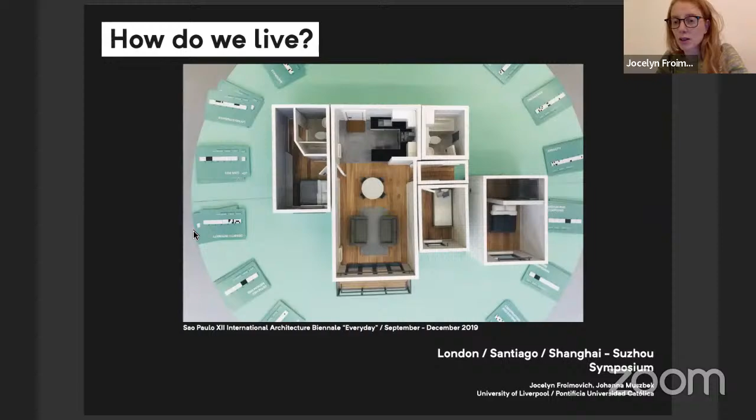The conclusion of this model is to critique the current housing offer as basically similar in all 3 cities.

It's important to mention that the exhibition that is going to travel to you is our latest iteration of the exhibit, which includes both the analytical part of the research and the manipulation of the typological repertoire that we presented.

We also launched quite recently, in November, our website, howdowelive.com. It's still in development because we view it as a dynamic index, a platform for us to invite a wider audience to partake in this discussion about current housing production. This shows the case studies currently classified both as design operations and the case studies representing the last 10 years of production in these 3 cities. This website is quite important for us.

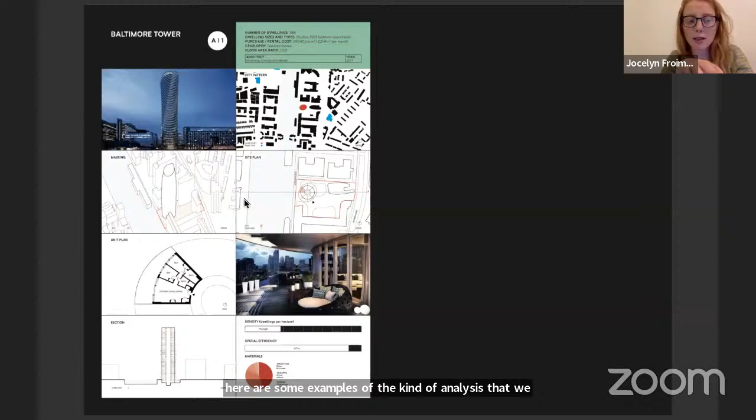Here are some examples of the analysis we did for each case study. The Baltimore Tower was one of our case studies, along with Douglas Tower and One Park Drive. This format allowed us to compare all the case studies one-to-one, analyzing the urban setting, its imagery, the kind of buildings, building systems, materials, and the layout of the individual units. This template was used to analyze every case study in each city.

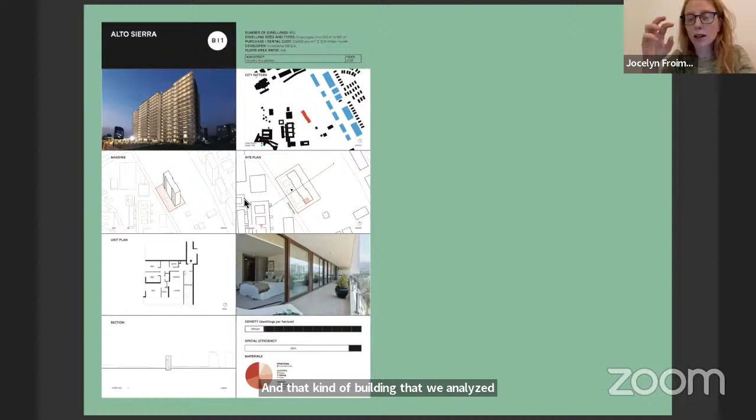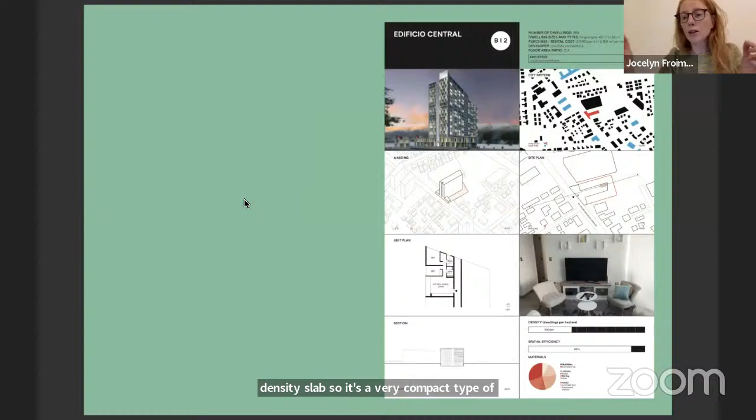Here we're looking at Santiago. The kind of building we analyzed within the high-rise, isolated high-rise category, is very different from the one in London. This is the high-density slab, a very compact type of building with a single corridor, different cores, and single units along the corridor. You can see all these types analyzed here - it's a very particular kind of compressed, hyperdense type.

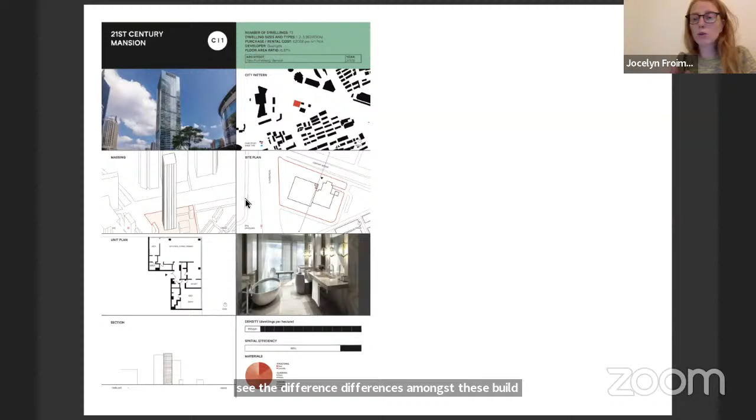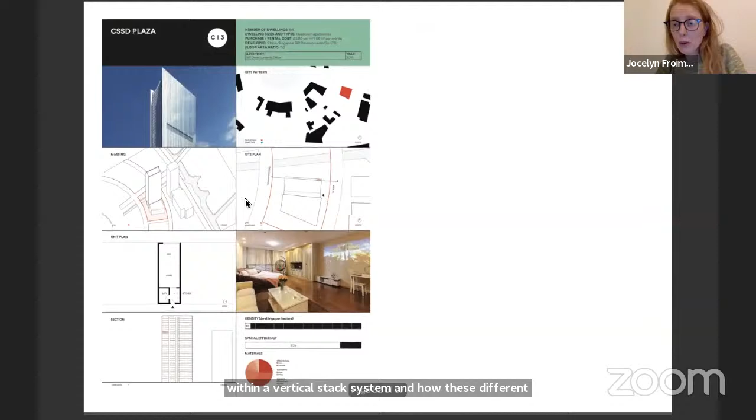Now looking at Shanghai-Suzhou, we looked at the mixed-use tower as a very extreme example of mixed use within a high-rise system. It was super interesting to see the differences among these buildings, how mixed use could develop within a vertical stacked system, and how these different programs reached the ground level and underground level.

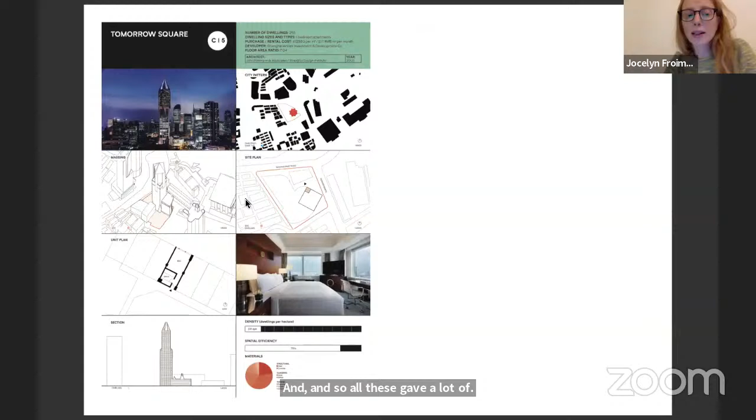All this gave a lot of material to analyze and then understand, so that we could fast forward into design categories, let's call them.

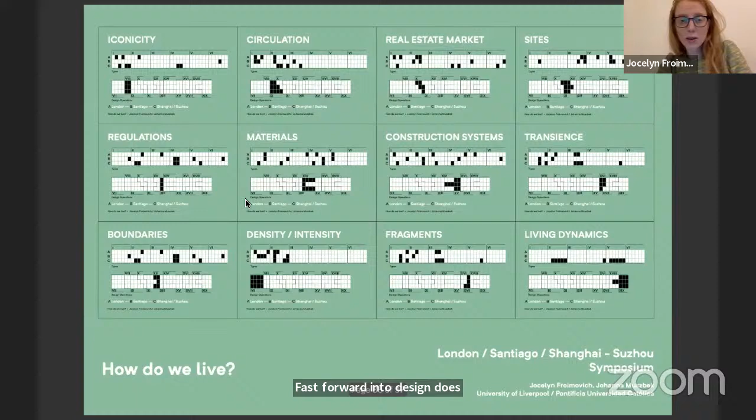As Jocelyn explained, our presentation - and you will see that in the exhibition - followed rows representing cities and columns representing types, and certain itineraries, as we call them, themes through which we started to compare and further interrogate our case studies, which allowed us to establish consistencies and particularities. These issues, problems and themes included sites, boundaries, density, intensity, iconicity, circulation, real estate market, materials, construction systems, layouts, just to name a couple.

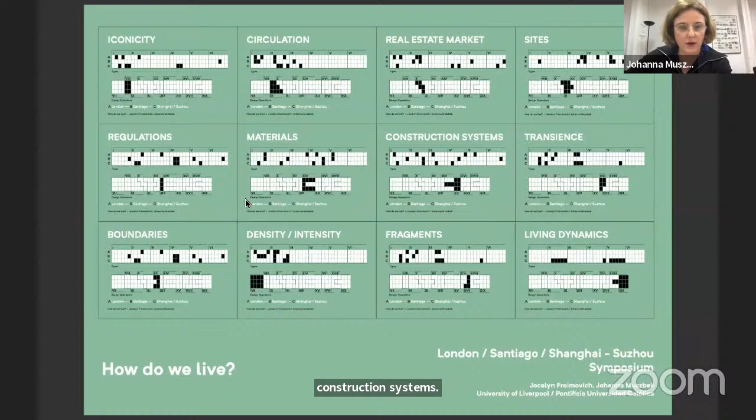Jos, you're up. Yeah, there's a little bit of delay, but now it's good.

So, basically, we would like to expand on this theme with you, just to give an example of how the system of the exhibition works. We left cards in the middle of the space for you to take, as if it were your guide through the exhibition. In this theme, you can look at the examples that have been selected and discuss this particular issue through reading them.

We thought that sites could be an operative term for us to think of design proposals, to fast forward ideas on how to participate in the question of the site. We've selected some of the students' work and proposals to discuss the idea of infill.

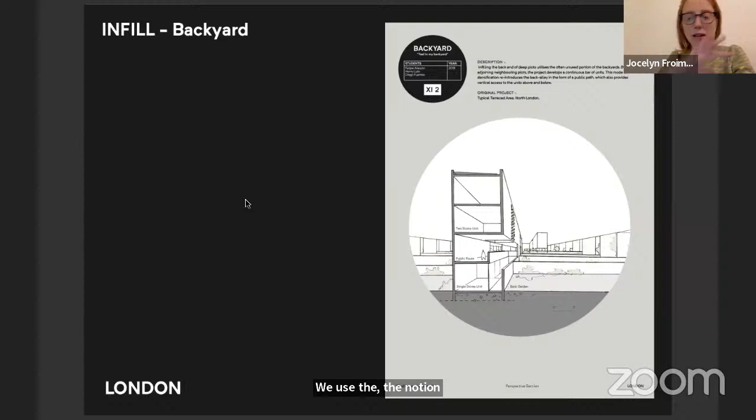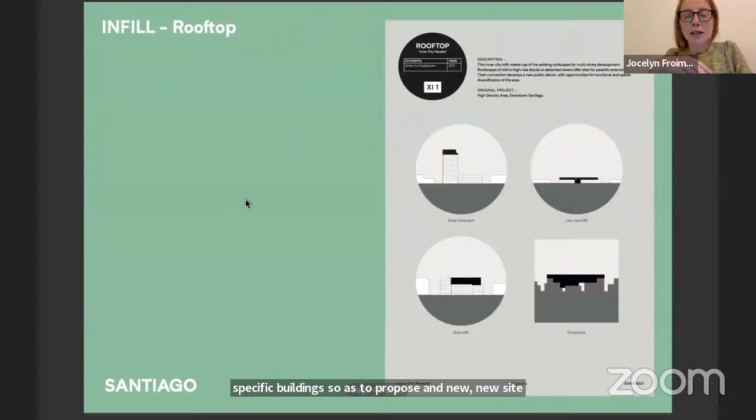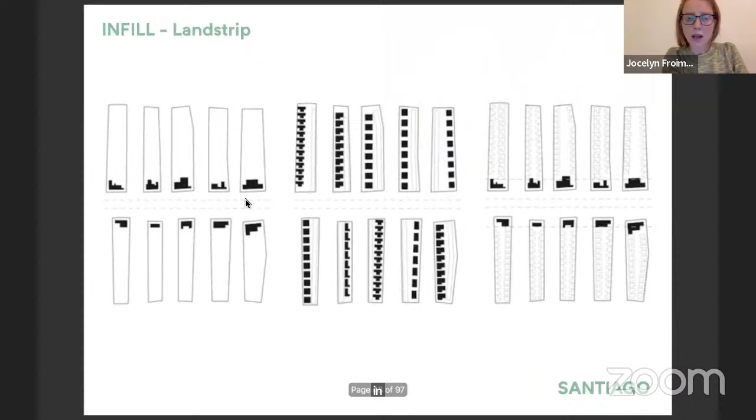We use the notion of infill as a common term to all of these projects. Some have worked in the backyard of specific buildings so as to propose new sites within the urban fabric. Some projects discuss rooftops as another possible site. Land strips have also been infilled through different types of projects. We have underground as another way of infilling sites, with density being a very important theme discussed within these projects.

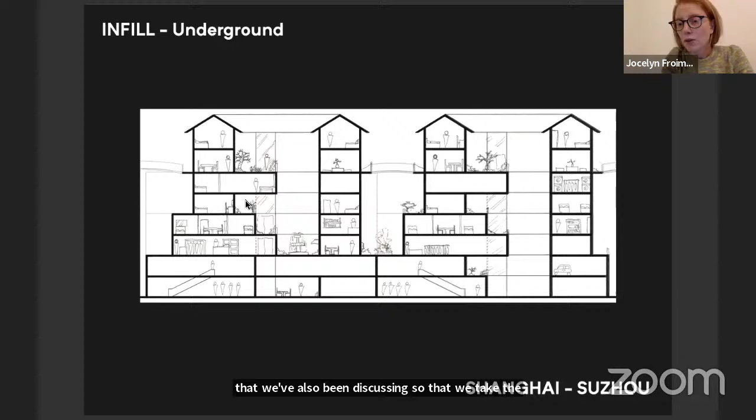All these projects are student projects that have happened throughout these years in the 3 cities we've also been discussing. So we take the cities as our base for analysis, basically.

This connects back to how we actually started the research project. We're not going to expand on that too much, but our interest started with questioning housing design through how housing has been taught, and looking at the major 20th century paradigm shift that still today defines the way we think about housing and the way we operate when it comes to design.

We looked at several housing studios, specifically starting with the most seminal ones at the Bauhaus, and then continuing at IIT in Illinois, both in Chicago — Mies van der Rohe and Ludwig Hilberseimer's studios. We looked at these studios as a way to understand how certain ideas, design operations and problems were thematized.